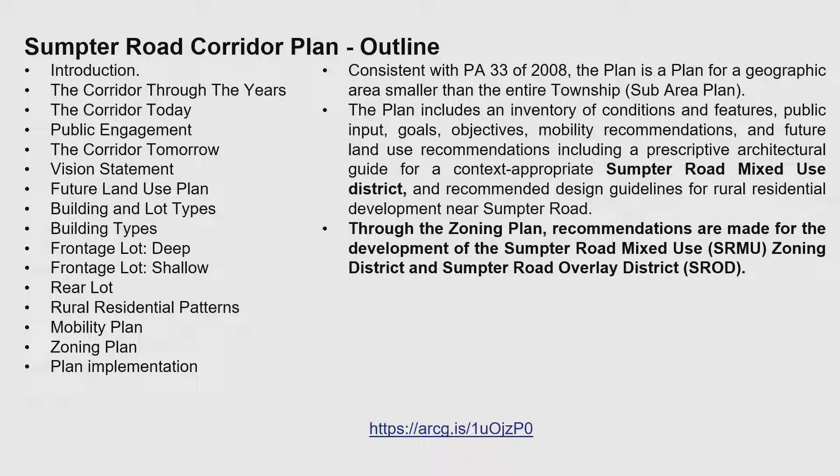But the full plan was provided in the packet for tonight. I encourage you to flip through it and speak on any continued recommendations for it so that Adam and I can know how to proceed from here. I don't know if Adam, if you have anything else you want to say about the plan to date?

You're doing a great job. All right.

Through the chair, Director Power. In the existing situation we have right now, the pink areas that are on the thing that I see is a local commercial district. What is the zoning on those? Those are primarily C zoning, although the parcel that is southwest of the corner of Hull and Sumpter, right at that corner on the southwest face of it, is actually zoned C1, where the gas station is.

And then the parcels immediately at Bemis and Sumpter Road, I believe, are also C1. I'll check that live in the meeting, but I think those are also C1. But everything else that's designated as light pink links to the C local commercial zoning district.

What control do we have over that, as far as the mixed use district will actually give us more control over what type of businesses go into those areas than what the general C is? That's right. If you look in the recommendations of the Sumpter Road Overlay District, similar to what we do with the Belleville Road Overlay District, there's an area north of Hull Road where we identify that only the uses that are in the Sumpter Road mixed-use district can be able to develop there.

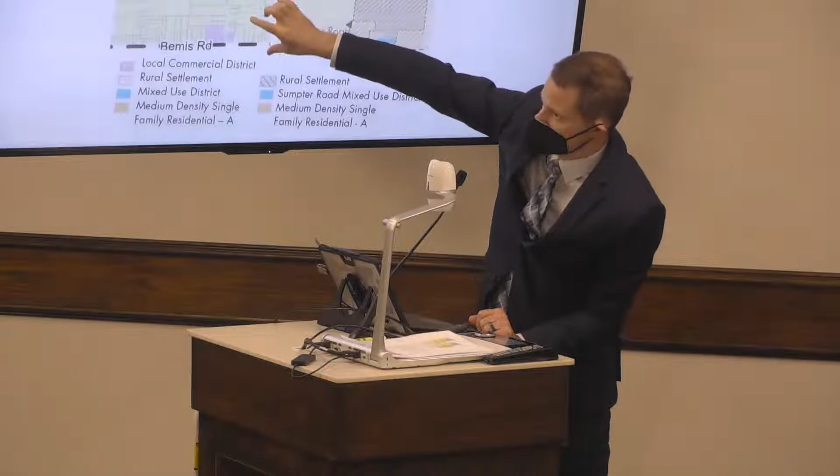So you can see here, and the color's a little off on this screen, but from top to bottom, north to south, in the previous plan there was an area identified as mixed use. But in the south side plan from 2006, and in the 2020 Van Buren Township Master Plan, there's language that identifies that we don't clarify what mixed use means or what it should look like, and we need to develop that further. So that's what we've done here.

But additionally, we've recognized that the commercial areas that were designated in 2006 needed to be reconsidered - whether they had to be relegated to commercial or whether they could benefit from having mixed use in the future as well. So that's why the actual mixed use district has expanded, and it's fallen under a more specific definition of the Sumpter Road mixed use district.

And you can see that even down at Bemis and Sumpter Road, those are identified as anchor lots in the new mixed use district. The area at Sumpter Road and Bemis Road has expanded in mixed use. And I should point to my actual page here, but this area has expanded, though it would be considered to be likely just one development site that's connected to the existing sanitary that's there. There's no desire from the public input we got to expand the sanitary or to have intense development grow along Sumpter Road.

Everything in between from that intersection to this one is still designated as rural residential future land use, with the caveat that what you see there is a hatched line. That hatched line is the area we've identified for recommended design standards for residential development, so it's not just a matter of people taking those agriculturally zoned lots and splitting them up into 1 acre parcels along Sumpter Road, or even as cul-de-sacs with 1 acre lots, but more thoughtfully designing them.

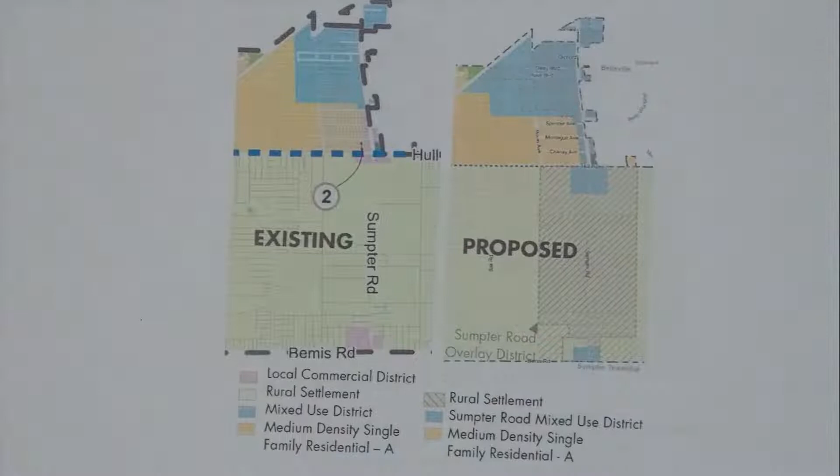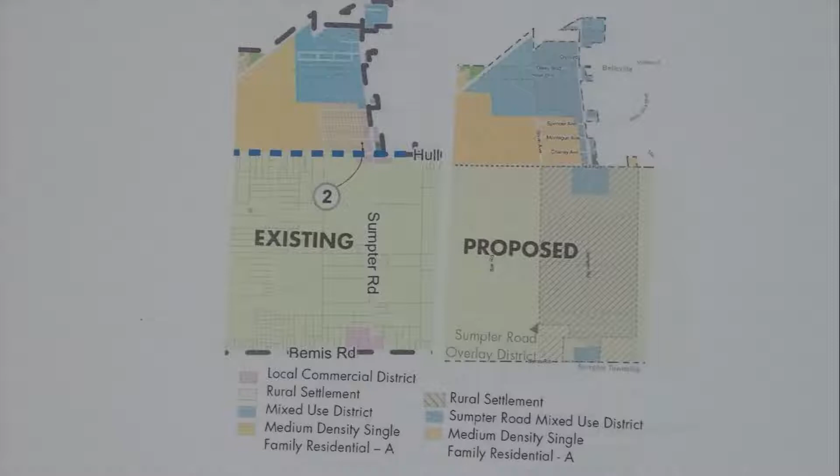One other change I'll note, right at the corner of Bemis and Sumpter Road, there's one landowner who owns three different parcels at that intersection on the northwest corner. He has expressed interest in down-designating one of the parcels. Where you see commercial around the corner on a big 6-acre L-shaped parcel previously, the landowner himself requested that we consider taking that back to a rural residential future land use designation, which would allow him to rezone to a residential zoning district. So that's one of the other changes.

Director Power, if this was to be recommended to the Township Board, could you walk us through what the next steps would be for adoption and when this would theoretically go into effect? Yep. If it's recommended to the Township Board, at the first available meeting they'll be given an update on the overall plan, and then they could pass a resolution adopting the plan right away. I think there's just one meeting for that. So the plan would then take effect, and from that moment on it should be a guideline for any future zoning decisions in that area.

Okay, thank you so much. Do any of the commissioners have questions this evening on this agenda item? No? Do you have any questions, Ms. Krishnan?

Do we have any public comment this evening or any questions from the audience on this agenda item? Director Power, I hate to bring you all the way back over to your computer again, but do we have anybody on Zoom or any questions from the public? Was your guess no? My guess was no.

All right, since we do not have any questions from the public and no more comments from the commission, are we ready to take action on this agenda item?

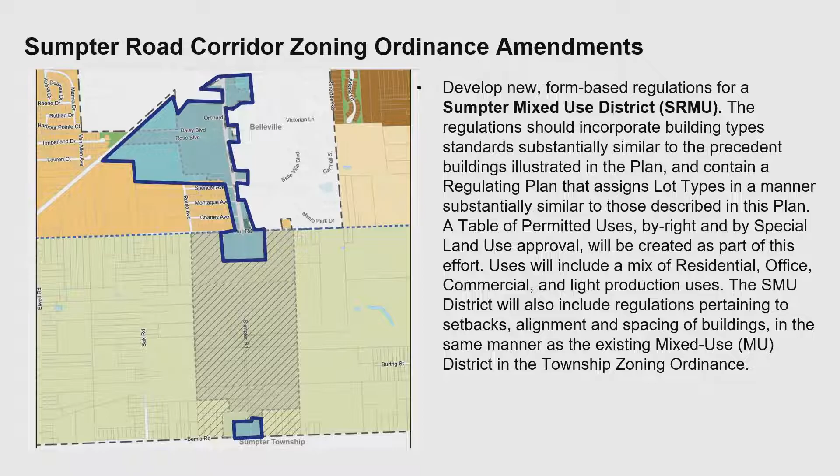Again, the areas in blue, or turquoise, on this screen are sorted into what's called a regulating plan based on what type of lot falls within that district. Here is a series of illustrations from the planning consultant demonstrating the four identified lot types.

Looking at the top left, that would be an anchor lot, what you might see at the corner of Bemis and Sumpter Road in this example. At the top right, you have a frontage lot called the deep frontage lot, which has different layers of potential development based on the long depth of the lot, and those are typical of the lots on the west side of Sumpter Road.

The shallow frontage lot is probably one of the more intense examples, but this is kind of a revisioning of the Bell Point Shopping Center, and what could happen if those buildings were brought up to the front. Those shallow frontage lots mean there's not much depth to them, and they're meant to be highly visual with more of those commercial and office components.

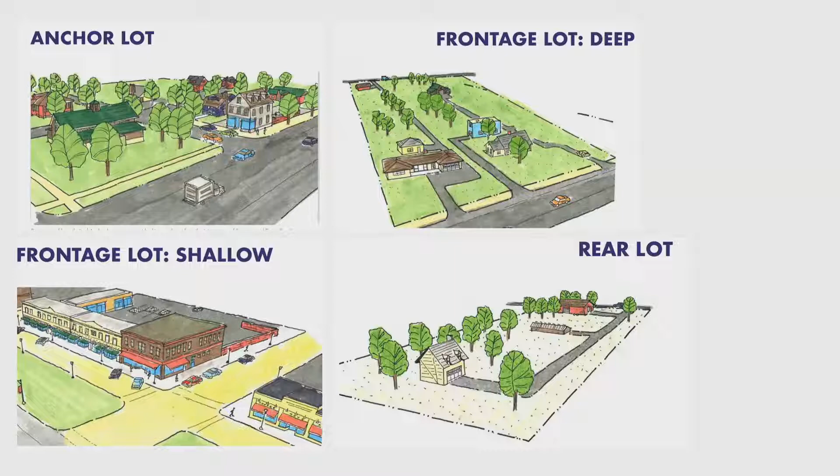The rear lots are those to the west of Sumpter Road behind the frontage lots, or that may be given access in the future but don't currently have access. So there are different development options for when they do get access.

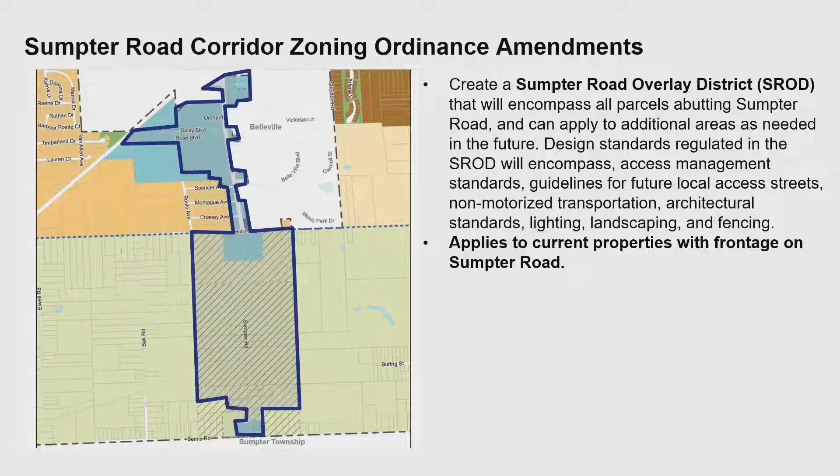The other item in this set of zoning ordinance amendments was the creation of a Sumpter Road Overlay District. Just like with the Belleville Road Overlay District, this is an area where certain design standards will apply when new development comes in. They're toned down compared to a formal downtown district, but there's still a lot of landscaping recommendations, lighting recommendations, and things about building character that need to be applied. In residential development areas, there are requirements on the spacing of driveways and roadways, and the pattern that has to develop to accommodate the desired residential form.

As I mentioned during the public hearing, this ended up culminating in edits to a pretty significant swath of the zoning ordinance, covering new definitions, new permitted uses, and bringing permitted uses into a new district, identifying in our table where those can apply within the district. There are also changes to the schedule of regulations and changes to allow that Sumpter Road Overlay District to take shape.

After our last meeting, I want to bring up some edits that were still in redline, and verify what those changes were. One was regarding the greenbelt requirements, to clarify under the permitted uses table that we're linking the commercial uses in the Sumpter Road Mixed Use District to the greenbelt standards typical for commercial, and the industrial uses subject to the greenbelt standards typical for industrial, just providing some clarifying language.

We changed a trigger that places limits on commercial, office, and industrial development from being based on a setback to an existing dwelling to being based on a setback to a residential zoning district. That was an important distinction we had good discussion about at the last meeting, and it will provide some limits and safeguards, especially on tight commercial or office lots adjacent to housing or residential zoning.

When you get into the objectives, which are more specific than the goals, we talk about maintaining and improving existing neighborhoods and developments by observing where reinvestments should occur on a continuing basis, being apprised of current programs and techniques to quickly identify and achieve identified reinvestments, and encouraging the development of new housing in so-called 'missing middle' formats and layouts that are currently absent or in short supply, by creating zoning districts and design standards as necessary in the appropriate areas of the township.

So I'd say that all as a backdrop—we have had trends in recent years that bring some of those objectives to light.

We see an increased interest in development of smaller lot, higher density, single-family residential detached housing, and increased housing prices, which is subject to change. But these trends aren't unique to the township. We also have a trend that may be more unique to us: a high number of residential site condominiums and subdivisions started 20 or 30 years ago that are maturing, with smaller lots mixed in with larger ones. I say this to bring to light that we want to position the township to enable robust housing in a more attainable lot or housing choice for new and existing residents.

In doing so, we wanted to take another look at some of the standards on the books, which were written with good intention to ensure a high quality of residential architectural character in the township. Specifically, the requirement that a high number of our garages face sideways, so you don't have the situation where garages are out in front of buildings, posing a visual imposition on people walking through a neighborhood.

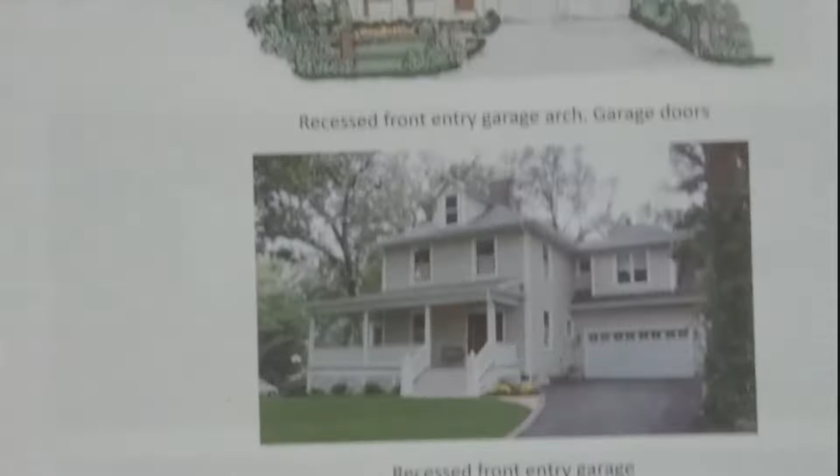If you go to the next set of elevations, the doors are designed like this typical example of a recessed garage door. In the first and second image, the front door of the house is there and the garage is pushed back. It's still a front entry garage, but the garage is not the first thing you see when you approach the house. This can be accommodated on a 50 to 55-foot lot.

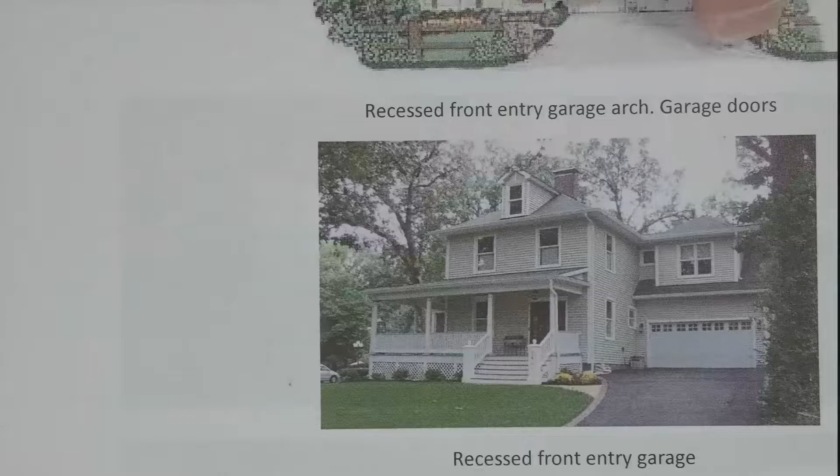This is a sample only for recessed garage. I would not advocate full siding front facades—I think we've come a long way in trying to get higher quality materials on our facades, and I wouldn't want to go back to just putting vinyl siding on the whole house. This is merely a representation of how the garages can be front-facing, placed towards the back, and not the most prominent feature of the house.

So this is purely for discussion at this point in time. I know it's something to digest—this is an ordinance that's been on our books for a long time, and 30% is absolute.

In almost all the other communities I looked at, they like side entry garages, but there's no minimum designated. If you're going to design a subdivision, you have to show at the onset which lots are going to be side entry—you can't just say 30% and leave it up to you to decide which. Those municipalities say if you're going to show us side entry, even if it's only 4, you need to show at the site condo layout which those 4 side entry garages are going to be. So that's one of the things we'd like the Planning Commission to consider.

Maybe it's something you don't want to consider, and you say nope, 30% or nothing. In some municipalities, the Planning Commission does have flexibility if a developer proposes much higher quality architecture.

For instance, the entire front facade could be masonry, brick or stone, with architecturally detailed pillars, like the first example here with a brick base. These homes are like what you'd find adjacent to downtown Plymouth—when you go down the side streets, you see these beautiful homes with wraparound porches.

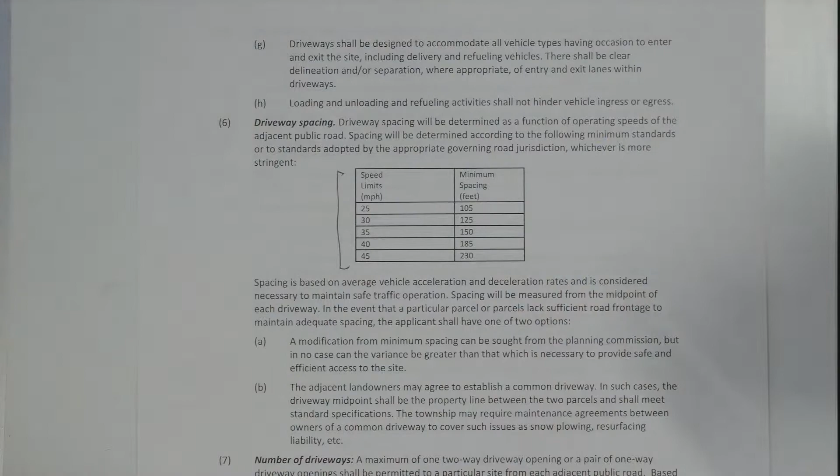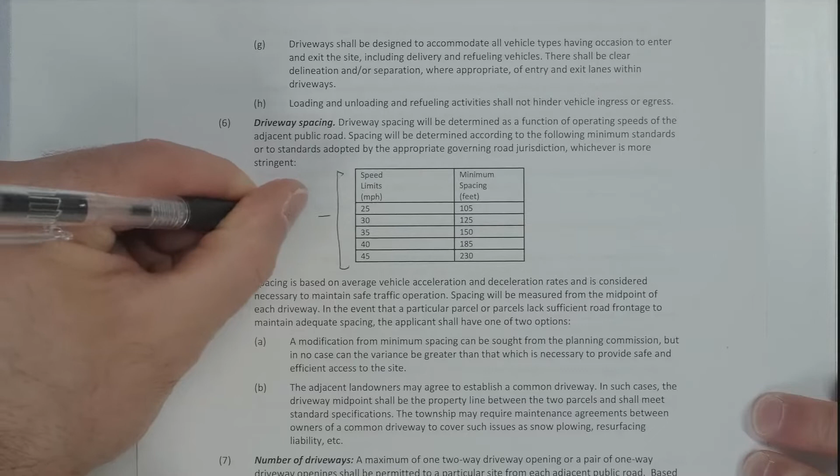And in subsection 6, which is driveway spacing on the next page, the spacing of the driveways has been updated for speed limit 30 onwards: 30, 35, 40, and 45. We have updated the spacing from 125 to 155, 185, 225, and 300. The reason we updated these numbers is it would be consistent with section 9.106C of the zoning ordinance. We already have driveway spacing requirements elsewhere in the ordinance. We want to make sure we don't have two contradictory sections.

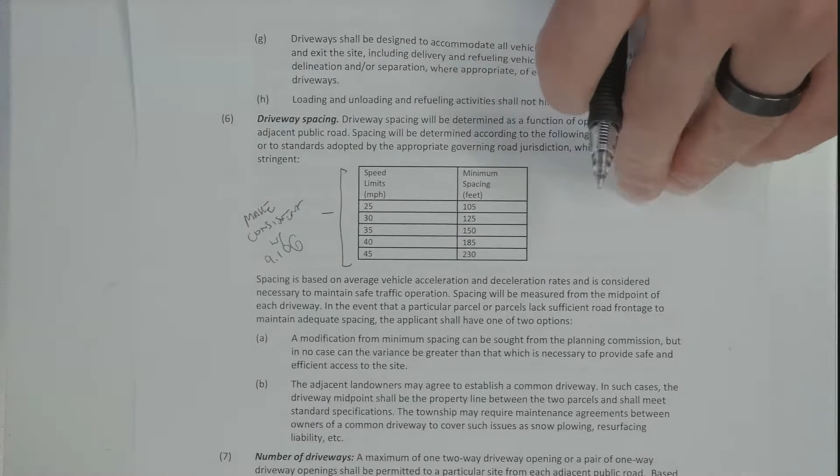Other than that, this specific requirement ensures that we have adequate pedestrian circulation, vehicle circulation, signage, number of driveways, number of pumps, how they are placed.

We did remove electric vehicle charging stations from this because Commissioner Cullen and Commissioner Jar had brought up very valid concerns. Somebody can just park right in front of the store and leave it there for 45 minutes, and now you're blocking everybody else from it. And we found a few sample ordinances for EV stations, and as the future seems to be moving more towards electric vehicles, we think there are going to be stations dedicated entirely only to electric vehicles.

So I think it requires a little bit more thought put into it. I initially went by the City of Grand Rapids ordinance where they just said EVs are exempt from zoning regulations. I don't think that's a good thing to do. So we will set that aside for more study at a later date. Right now, there is no pressing requirement.

We haven't been approached by anybody, but we will definitely look into that. When we have a little downtime, the Planning Commission can look at a few sample ordinances we provide.

So this is before you tonight. You've discussed it a lot. If you don't have any questions or additional changes, it is up for recommendation. Yes, you can recommend to adopt it with those changes mentioned. We'll make sure a copy of the ordinance gets to the board with those minor changes. All right, thank you so much.